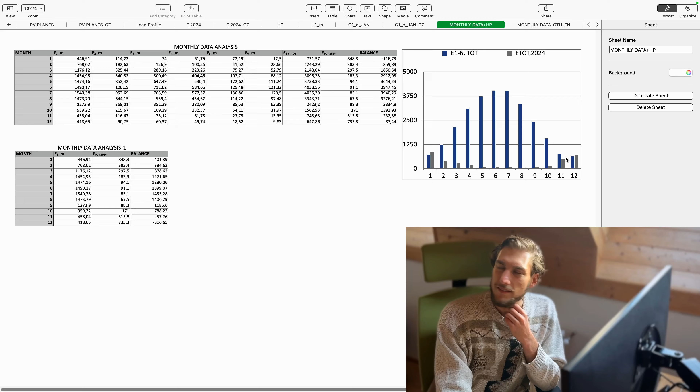I'm super happy to have this kind of daylight here. So you still didn't have enough of PV? That's great. Come with me and let's finish up this project finally. What inverters should you choose? Let's walk you through some examples of that.

We're going to be looking mostly at hybrid inverters because they not only transform to AC, but they also provide the capability of storing the energy into battery storages. And so that's what we're going to be using in either the case of a fully autonomous off-grid solution or even in the case of a grid-connected solution. So let's have a look at that.

Now, one thing to note is that in case of a new build, in case of a design, the intention is, of course, to lower all consumption to the lowest amount possible. And therefore, I have actually seen an autonomous house being built where the aim was to design a single-phase system so that it reduces all the unnecessary costs. So that's just one thing to keep in mind.

We're going to distinguish three scenarios, two of which are going to be fully off-grid, because I'm a huge fan, just to illustrate that. That's in a case we had enough electricity production from the PV in all of the months and a big enough energy storage, which I'm going to talk about later. And the third scenario is going to be the most common one, where the house is still going to be grid connected, but the solar system is going to be added as an addition to that. So first, let's have a look at the autonomous example with three individual single-phase inverters.

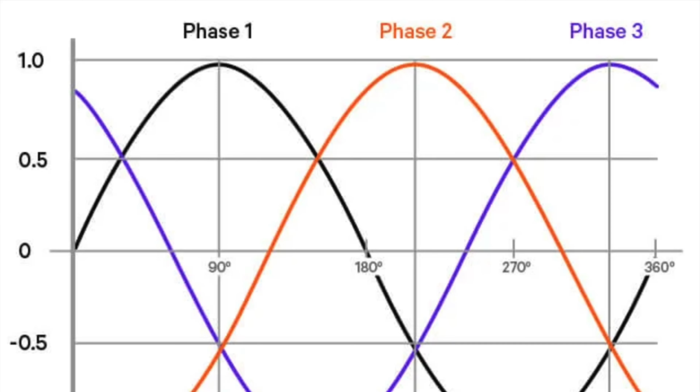This is going to be a solution from Victron, which actually provides great documentation on how to wire them up. The question is, how much power do I need the inverters to have? We're going to see that just now. The total load of all of our appliances based on the load profile would be somewhere around 24.9 kilowatt. The funny thing is that the current state of the grid with the 25 amp three-phase breakers we have cannot afford to power this. So 25 amps times 400 volts times the square root of 3 times 1, simplified for resistive load only, gives us about 17.32 kilowatt.

And it's acceptable because we don't need all appliances to run at the same time. What we need is to be able to pick which appliances need in every case to be able to run simultaneously. So let's have a look at that. If we were to sum up the heat source, the heat pump, including all control and measuring devices, including some kitchen appliances, while simultaneously running a washing machine and a dryer cycle, we would be getting somewhere around 15.5 kilowatt. So what exact model should you pick?

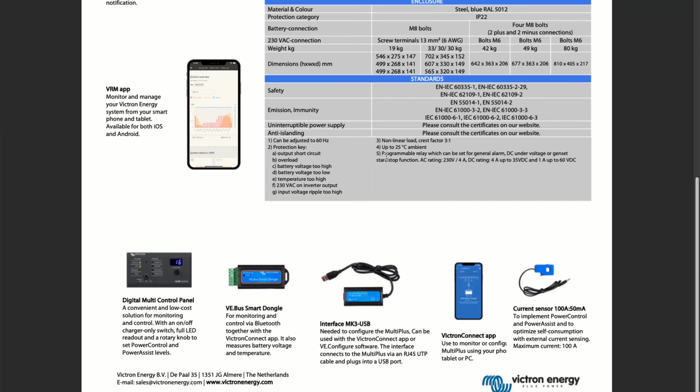Provided that the phases are equally loaded, which God only knows. The only way to really find out is to measure them. But let's assume that they are. We could be fine with 3 of the 5 kVA models, or maybe to be more safe in a fully off-grid scenario, the 8 kVA.

Okay, second case scenario, a single device, of which there are some available. In fact, there are actually inverters available that have built-in MPP trackers, and so this actually saves us the need to have separate devices for them. There are solutions from Solax, which offers up to 30 kilowatt of power in a single device, which is really nice. But now let's have a look at our grid-connected example, which might even be the most common one.

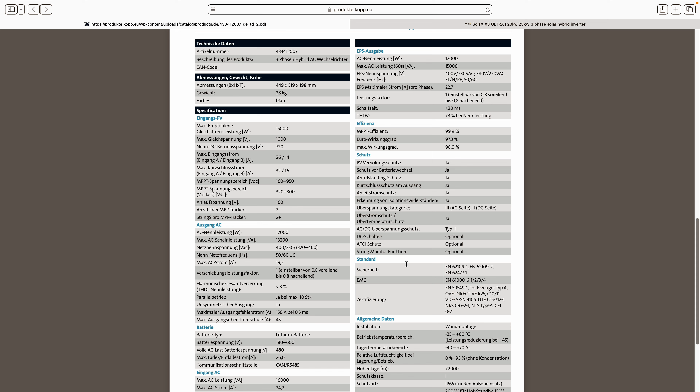There are devices from KOPP which should come into consideration. They make three-phase hybrid inverters up to 12 kilowatt in power. And what's actually great about this one specifically is that it includes 2 MPP trackers, each one allowing for 2 strings, and a total peak power of 15 kilowatt peak, which would be enough for us. So this actually seems like a great solution.

Does it fully cover our load? No. However, in case of a grid connected system, it can serve as a very good support. The only downside is that KOPP does not have transparent pricing on their website, therefore I wasn't able to incorporate it in the budget, which I'm going to show you later. However, they're probably wanting you to reach out to them.

Let's talk a bit of energy storage. Why we need to store energy in the first place? Well, energy storage in a renewable system works kind of like a balancing measure. So it covers the period where the production from the renewable isn't high enough to meet our consumption. And when there's a surplus, that's the time when it actually accumulates, right? And so with big enough storage, we can even run fully autonomously.

However, even if we don't intend to run fully autonomously, it still provides us with kind of an accumulation of power. And so what paths are there to take? We're going to be talking about standard battery storages. As of now, it's common to use LiFePO4 batteries. Or convert it directly into heat, well, hot water in a hot water tank. And this is really tied to how other systems in the building are designed.

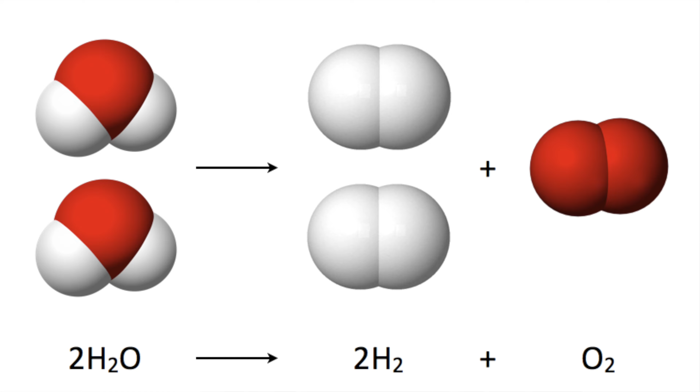We're not gonna get into transferring heat from water to electricity. Not very applicable to residential. We're gonna be also covering hydrogen storages and hybrid battery and hydrogen storages. Hydrogen! Now we're getting to the fun part. So we've got on one side DC power, which applied to water performs electrolysis, producing hydrogen and some other things. And now hydrogen, the molecules of hydrogen can be actually stored in steel tanks.

There used to be underground hydrogen storage tanks. However, there actually are nowadays on the market available products for hydrogen production and storage for residential projects. Very interesting. After converting it to hydrogen, we have two options actually. Either to convert it back to electricity using hydrogen fuel cells, or, which has a higher efficiency, however, I don't really see it being applicable to residential projects, use a hydrogen gas turbine that converts it to electricity and heat, which overall has a higher efficiency. However, that's not really our case. Works kind of like an engine.

What this is good for is that the energy density is pretty much around the energy density of LiFePO4 batteries. And based on market research, there are storages available up to 1 megawatt hour, which would be a solution for the fully autonomous system. Now, what are the downsides? Well, of course, costs. However, there is a bonus in using a hybrid hydrogen plus battery system, which kind of works in a way that the batteries are used for short-term storage and hydrogen is then used for longer-term storage. And with a good control and measure system, I can imagine this being very efficient. And maybe some more creative approaches to that.

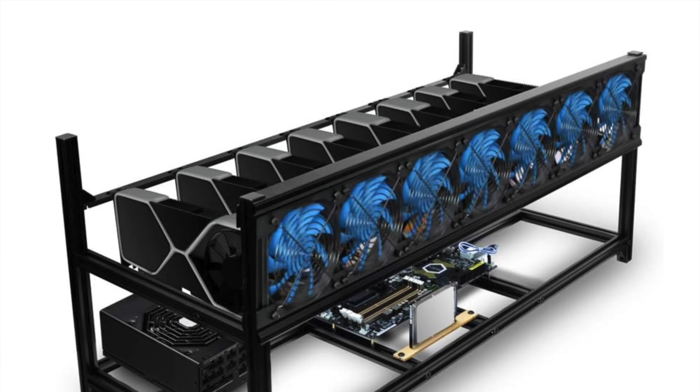Of course, there are creative solutions what you can do with energy surplus. It's really great to have some surplus of energy. Well, in the case that you can store it somewhere, you can run crypto mining rigs, although I'm not sure if I can be talking about sustainability there, because the actual energy consumption in order to produce a single Bitcoin is getting higher and higher, and therefore it's not as hot as it used to be. You can also feed the heat into your pool or a whirlpool outside, whatever. Creativity is the limit, or sky is the limit.

What did they say? Never mind.

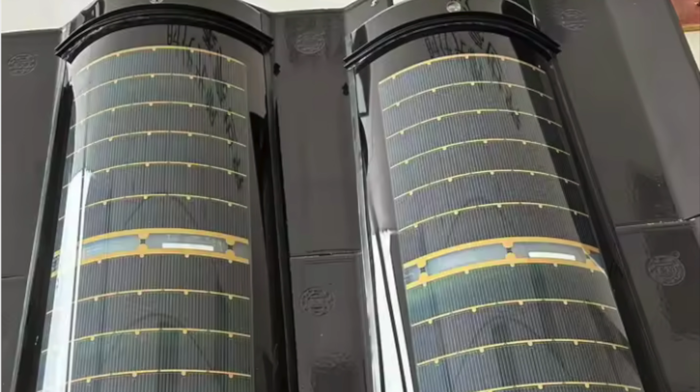If you are still in the design process of the building, you might note that there are other solutions than installing panels on top of the roofing, which I'm gonna go through just now, which might in the end look a little bit better, provided that you pick something that looks good. Tesla still probably makes the best looking integrated tiles. As you can see, here is an alternative to that, which doesn't really look as good. There are also tiles with integrated hooks, and this is a solution which is not mine.

However, we're talking about a custom design used for an autonomous building, in this case actually, where they used the panels themselves as the final roofing layer, and the result just looks pretty damn good.

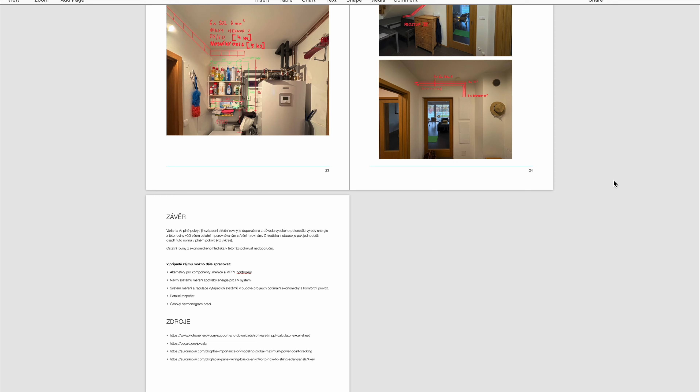Now, we can calculate the budget for this kind of system in material. And now I'm gonna show you that in an Excel sheet. And to be honest, it's really very project specific. So it's just for illustration. The prices are converted from Czech crowns to euros based on Czech prices. So you're either way gonna have to budget it based on your project.

But just to see what this project may cost in Central Europe, note that this is without the installation works. This is just the material. And we're also going to talk about ROI, although it's not really applicable for this system as the intention is not to sell the energy. We're going to see how profitable PV systems can be if the energy is sold to the grid.

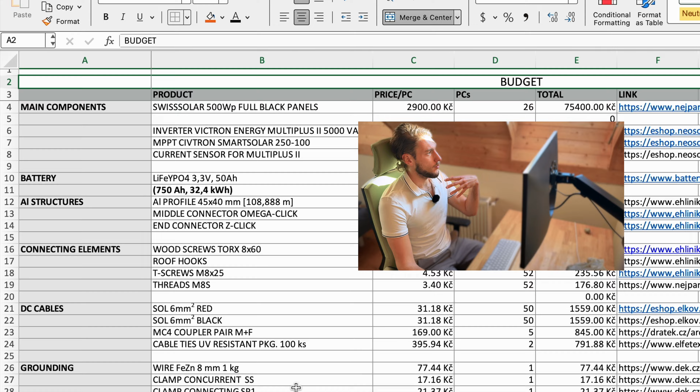You might be wondering what a PV system costs. So let's finally have a look at the budget. Now, switching attention here. Do note, this is just for the components, no labor included, although you could budget it based on this. I haven't done that. So let's focus on the components. We've got the 26 SwissSolar panels.

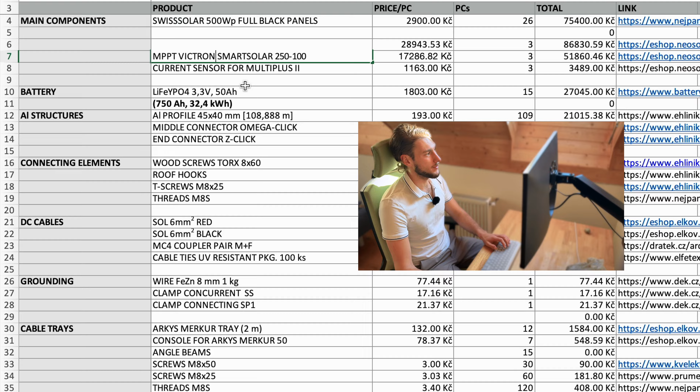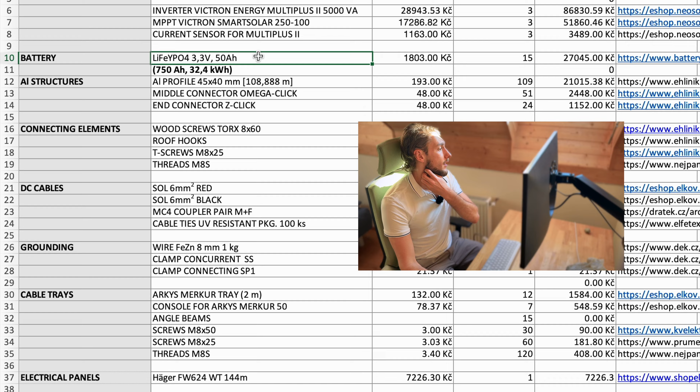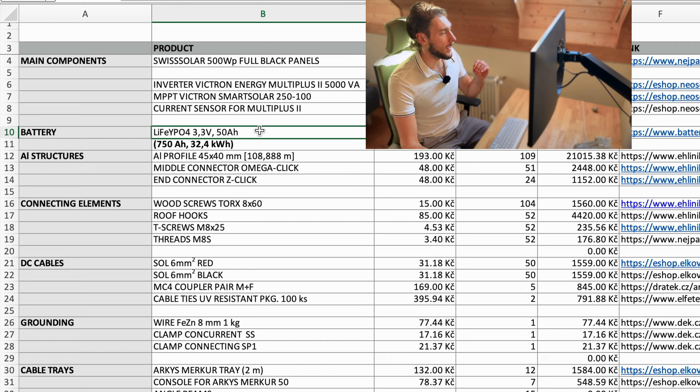This is the version with the 3 pieces of the Victron Multiplus 5000 VA inverters. We've got the Victron MPPT SmartSolars, 3 of them. And what seems to be necessary based on Victron's wiring diagrams are the current sensors, so I included them. What I didn't include is further measuring and control devices, although the inverters themselves should have some capability. And in the bottom, I've also added the Cerbo GX, which doesn't seem to be necessary. However, it's there just for reference.

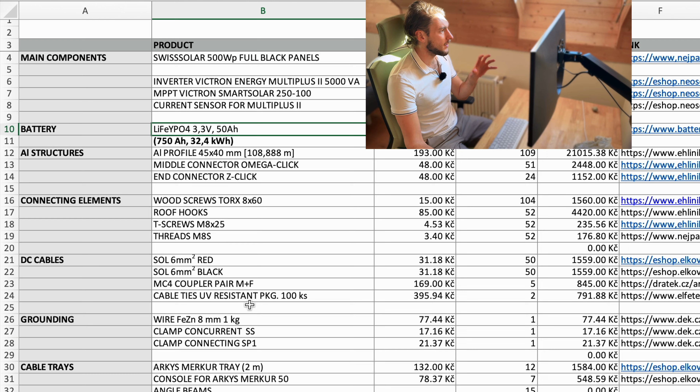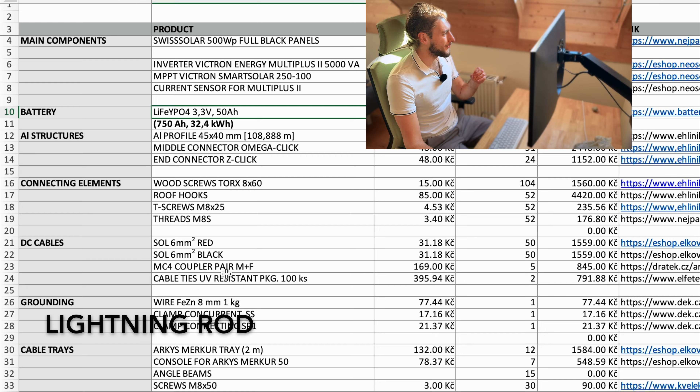Now, we've got the aluminum structures, including connectors. We've got connecting elements, screws, things like that. Cabling, DC part. We've also included grounding so that it can be connected to the lightning rod on the roof. We included cable trays based on this specific project, including screws and angle beams, consoles, stuff like that.

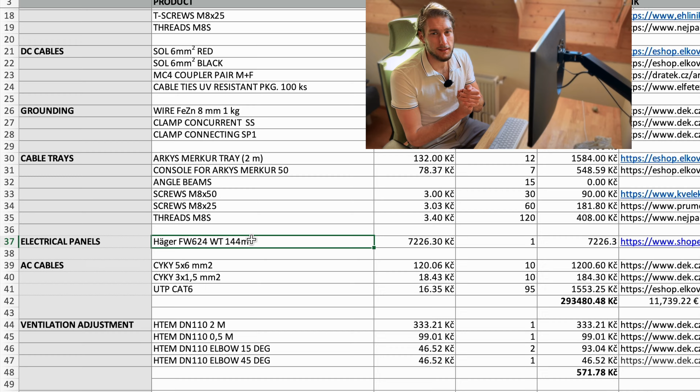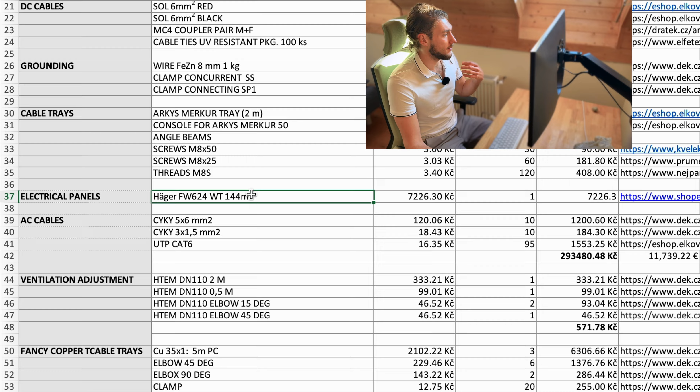Concerning the electrical panel, I selected a 144 module one. This might be a little exaggerated. However, I always like the electrical panels to have a reserve for future projects, and provided that this project might be extended in terms of the electrical systems, measuring systems, and control systems, it does really come in handy. There is nothing worse than not having enough space in the panel or in the rack. So let's just include that. For a simpler system, a smaller one might be used.

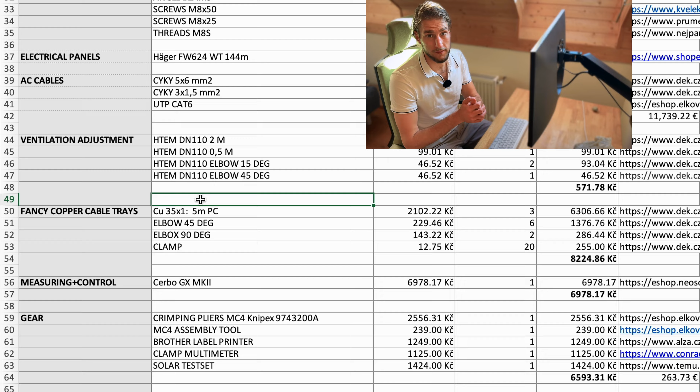We've got some AC cabling, and now the rest is pretty much project specific. There is some ventilation adjustment that needs to be done, and I selected some fancy copper cable trays because they're going to be run in the interior, and this is just a design thing, including the Cerbo. And there's also some gear.

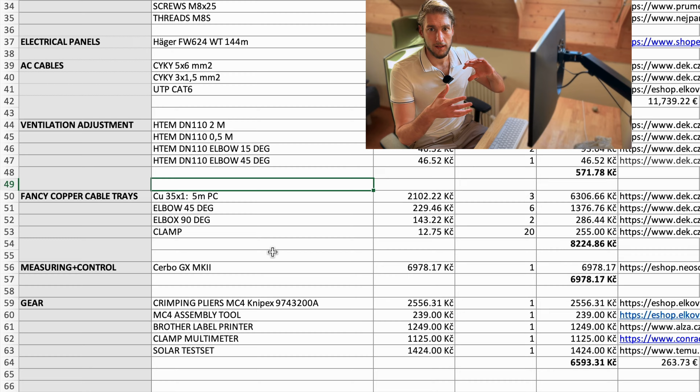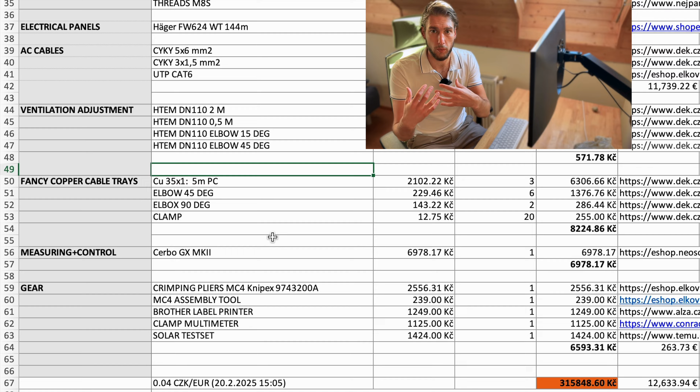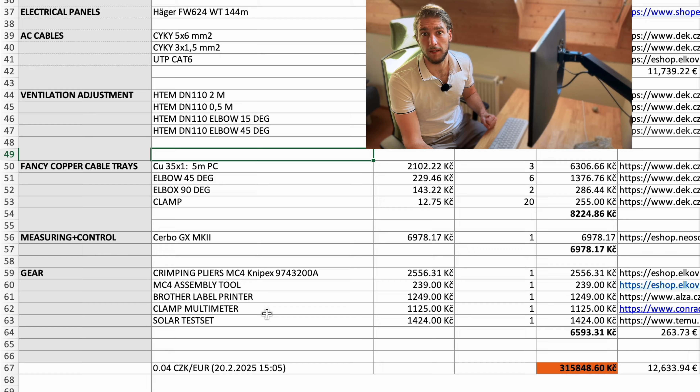Now this is not all the electrical gear one would need to finish this project, but this is a selection of basic gear in order to work with PVs, especially with the MC4 connectors. We've got some crimping pliers, etc., and a test set, and some other things that might be extra. So if we look at it now, as I said, this is just converted from Czech prices, so the prices are local and they're specific to this project.

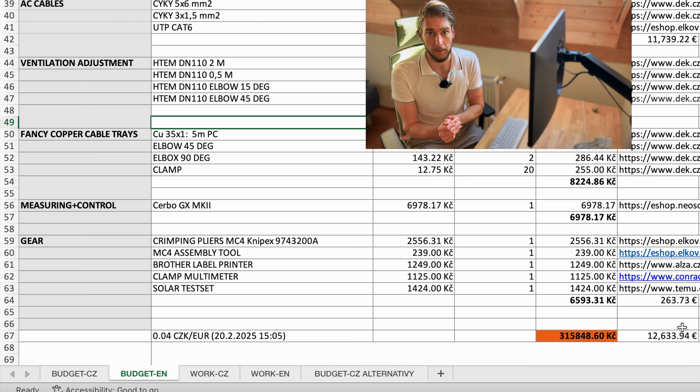But if I converted them to euros, we'd be around 11,740 euros for the basics, and for the total, this is 12,634 euros without labor, without additional measurement devices and control devices. So this is just the realm where you will be headed.

One other thing to mention is that the batteries used are 15 pieces of 50 amp hours, so 750 amp hours together, 32 kilowatt hours. Now this is not intended for the system to run fully autonomously. This is just something that might be pretty much okay for a grid connected system. So that's what I came up with. So let's use the 12,000 euros for our further calculations.

Nice calculator on pvcalc.org that allows you to calculate the ROI for a given power plant. And now the nice thing is that it accounts for running costs, so maintenance, it accounts for inflation, it accounts for the electricity price and inflation of the electricity price, as well as it allows you to input financing options if you're not financing it from your own funds.